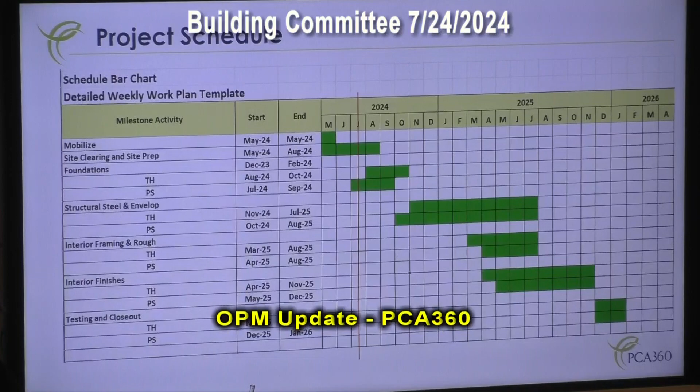Okay, yep. So we'll start with a schedule update. This is a schedule that we received from W.T. Rich, a very high-level Gantt chart of the project. The red line shows you where we are in the process right now. So the site clearing and site preparation work, we're more than halfway through. Foundations for the public safety building are underway. They've been making great progress, and I'll show you some photos of where things stand.

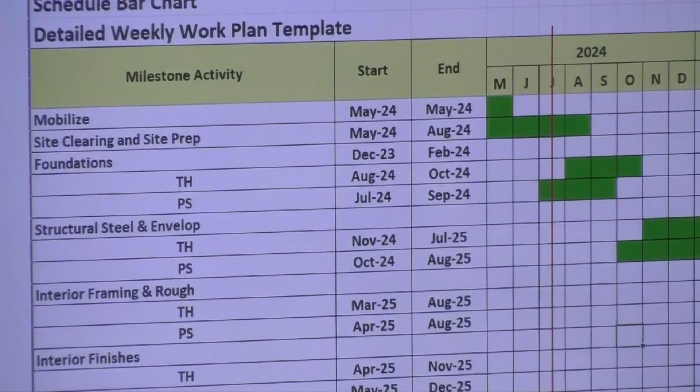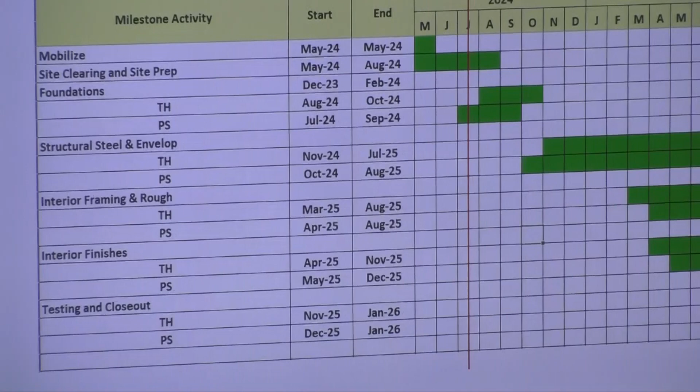Very soon, W.T. Rich will be working on the town hall foundations. So that's good news. And it shows the structural steel for the public safety building will begin first, and then the town hall will follow after that in the month of October, November. At the moment, it looks like we might even be doing a little bit better than scheduled.

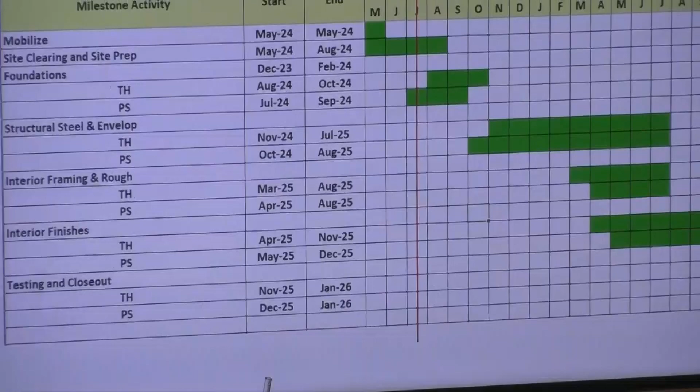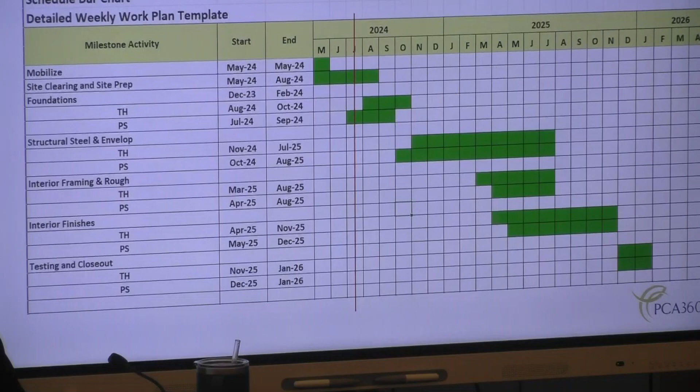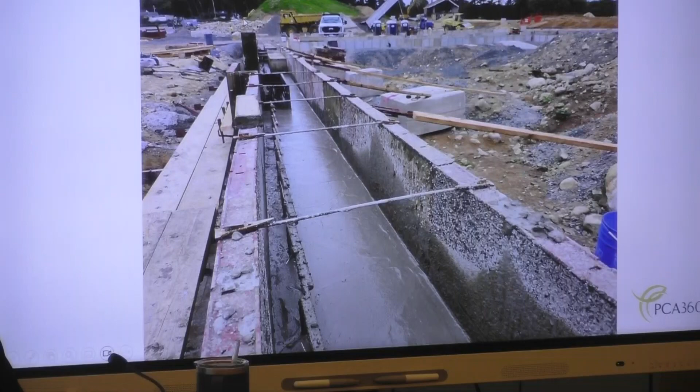So that's that. There's an image. You can see the old clubhouse off in the background, the giant mound of dirt that you can see from Route 114. I was joking with Mr. Hood at the end of the table, we were going to call it Mount Hood. I see what you did there. Go up and measure it, 65 feet.

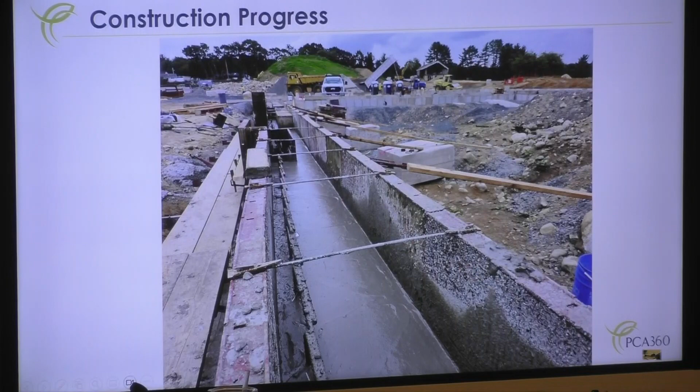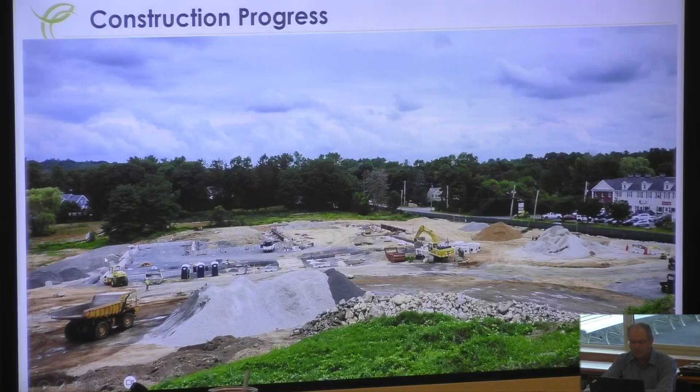This is the front corner of the public safety building. This U shape here will be the back behind the apparatus bays, and there's where the parking secure park end of the public safety building will be, this end here. And you can see over on this end, they're beginning to build up and prepare for the future parking lot. The secure parking and the communication tower will be in this area here. So you really are starting to see the outline of that.

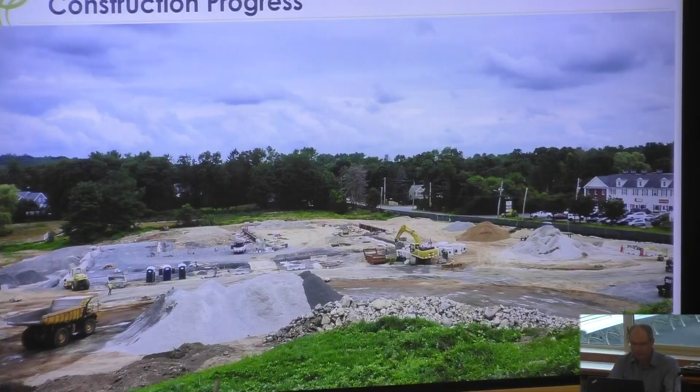Great. And then the road coming in, they just started preparing the bedding. You can actually see the shape of the road bed is beginning to take place too. So that's that. And then we have a time-lapse video, which is on the project website. So let me play this for you.

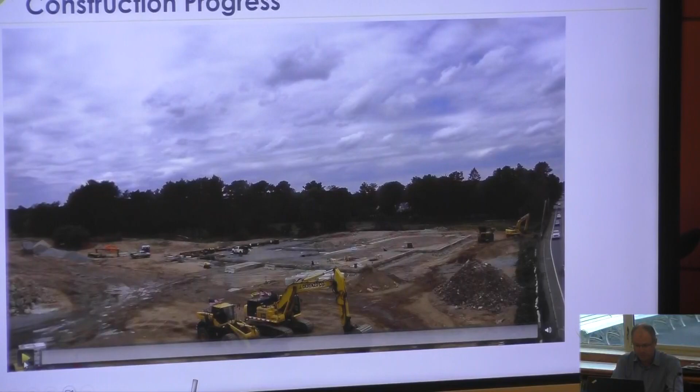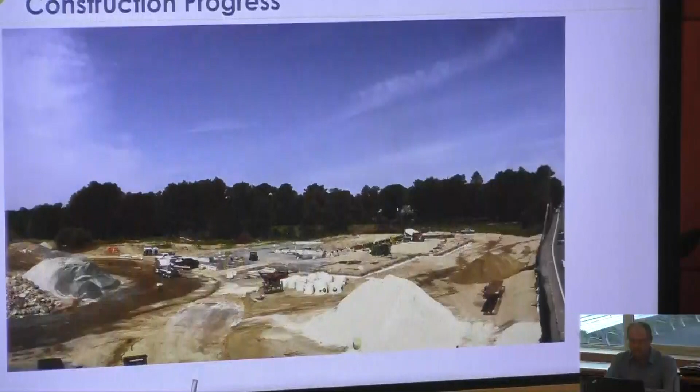This is just about a 2-week time period. We just got the cameras set up after the foundations had already begun and the site was cleared. So you're really only seeing about a 2-week period. We'll be updating this about once a week, as the time-lapse video gets longer and longer.

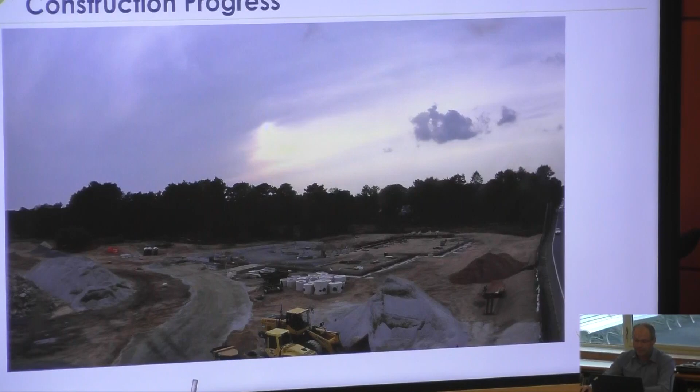So it's on the Middleton-MMC website. And again, from this view, you can see the roadway coming in pretty pronounced. Cool, looks like a project. So on Tuesday, they began the demolition of the clubhouse. You can see they're just reaching into it now with the excavator. It was down at the end of the day yesterday, and they were starting loading out today.

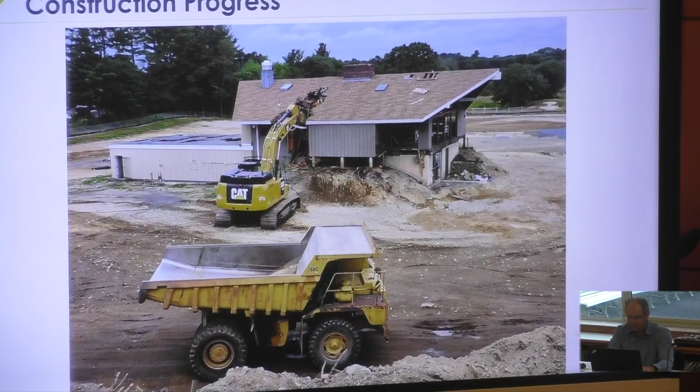A little quick update on the budget. I printed out for you, Jackie pointed out, a larger version of the budget that I normally present to you, and nothing significant to report this period. What you have in front of you printed is the detail. What I have up on the screen is the summary. We received our first construction requisition for the project.

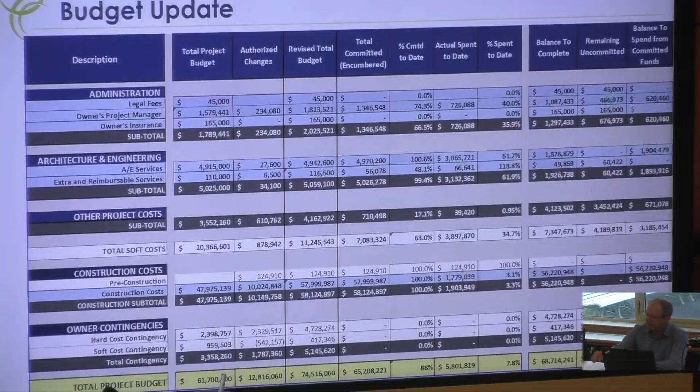There was just over 1.7 million that was submitted yesterday and will be on the next warrant. So that's reflected here in the costs. Actual spent to date, even though that hasn't hit the warrant yet, I track it as soon as I submit it. We're at $5,801,000 so far, 7.8% of the total project budget that has been spent so far.

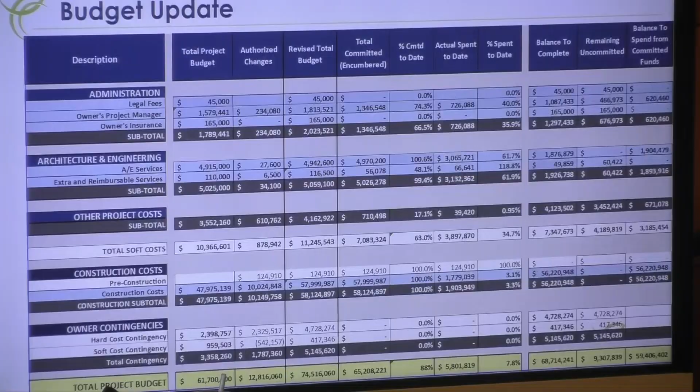So nothing, no moves just yet this month. Next month I will have a few. I would point out at the very top under administration, the third light blue bar down, owner's insurance.

That was builder's risk insurance. We did work with the town's provider for securing a builder's risk. We also, WT Rich, worked with their vendor. And in the end, the best, most competitive price we had was through WT Rich.

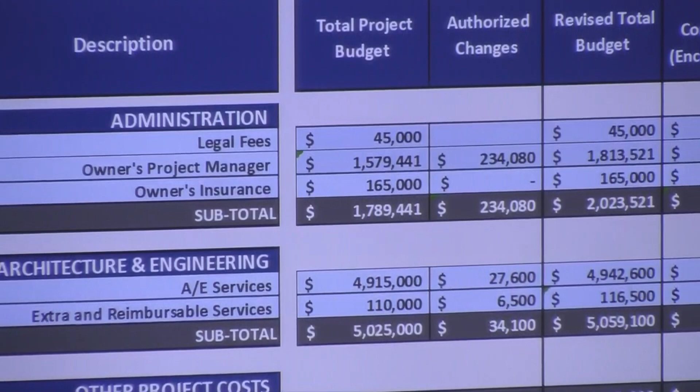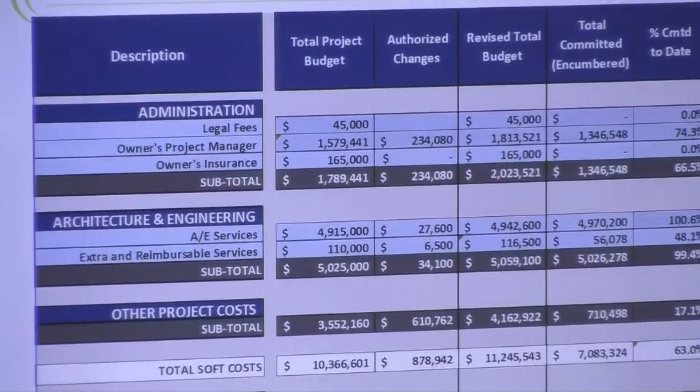That's the good news. The bad news is the insurance companies were classifying the buildings as wood frame buildings, even though they're substantially constructed in steel and concrete deck and CMU block, but the roof is wood truss. And because of that wood truss, they classify the whole building as a wood frame. So the builder's risk policy was more than we were expecting. I'll present to you a little later in our presentation the actual number, but it was a little over $300,000.

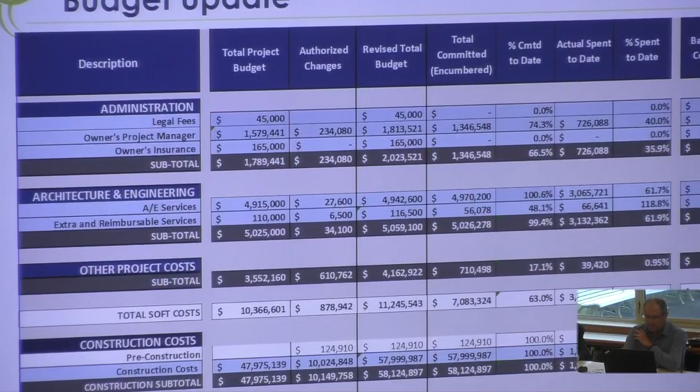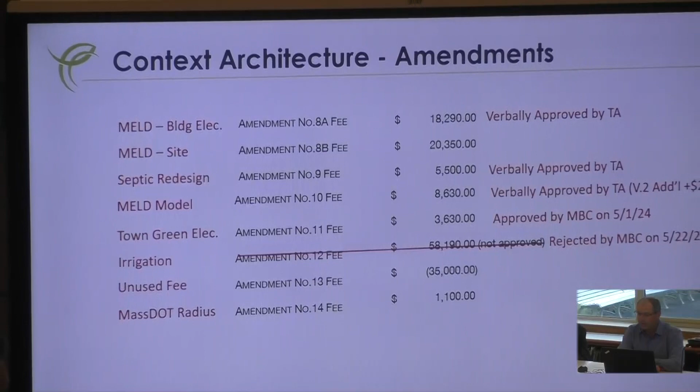But I'll explain to you how we're going to cover that cost. So that's the update here on project budget. Nothing significant really to report. We do have some amendments to contract that we would like to get approval on tonight for Context Architecture.

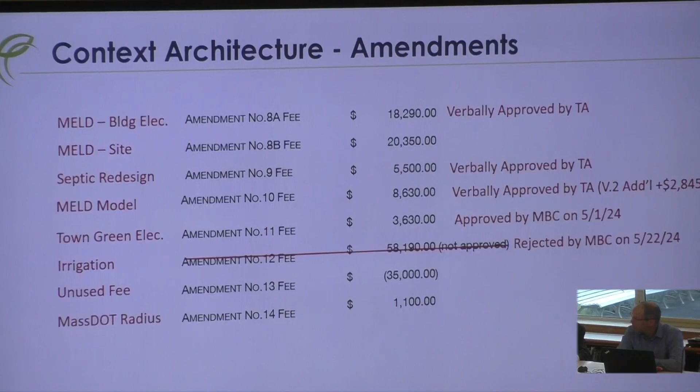I've summarized some of the ones that were presented to this building committee on the 1st of May. I just wanted to sort of recap some of these. Jackie, you and I talked just before this meeting, we're going to bring these to the select board at their next hearing at the end of the month and get these all executed for Context.

So the first one, 8A and 8B. I actually asked Context to break this into two. When we presented this to you before, it was one. We asked for it to be broken into two. There's really two very distinct scopes of work related to the MELD peak load shaving generator.

The interior of the building, the electrical systems of the buildings are changing because we're changing the life safety generator. And that has an impact on the main switch gear, on the transfer switches, and the actual generator selection. We met with Justin to go over this, and we got a contingent approval to move forward on just that portion of it so that we could keep things going.

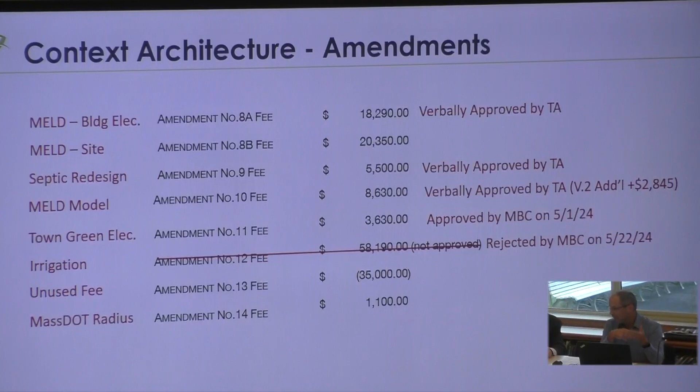Because one of the things that we learned now that we have Wayne Griffin Electric on board, the lead times in some of these equipment is still quite long. And so we're under pressure not to impact the project schedule. We've got to get these reselected and resubmitted so that they can be ordered. So that had to be done very quickly so that we weren't impacting the project. So we received a verbal approval to proceed.

And then we presented this to you in our last meeting too, so you're aware. So no vote was taken. But the other half of it is the site cost. And at the time when we had that proposal, we were still not fully clear on what the site impacts were. We were still working that out with MELD.

We've received a lot of information. The feedback has been great. The dialogue has been excellent. Now we have a very good understanding. Our team knows exactly what we need to have for infrastructure to support the generator. So the cost did go up a little bit more because there is more work than we originally expected. This cost here covers the site electrical and the civil work associated with the MELD generator.

So we would like to get approval for both 8A and B, I guess. Well, 8A we already have contingent, but B we don't. So if we could get an approval on that.

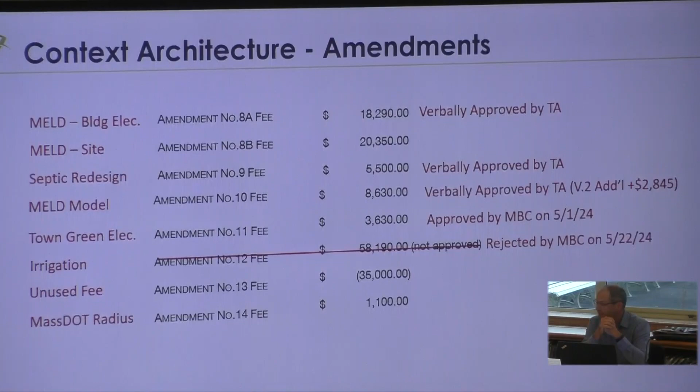I don't know if you have questions, if you want to see the actual proposal—I think we have it as an item further down, don't we? Yeah, I didn't know if you wanted to handle this under business and budget stuff, or did you want to take this later? Folks, what do you want to do? I'm happy to just dispose of it now if we want. All right, sounds good, I'm happy to take a motion. Kind of why I asked if we could have a little latitude on the sequence. No problem, I didn't realize that was the sequence you were referring to. Well, there's a few others coming at you, so. All right, nice.

Last question—I think we've had Context doing work to redesign things.

Is that something we haven't actually authorized or come up with a number for, or did we? I'm trying to remember - those redesign costs, as you were figuring this out from the modeling cost. So that's what I call the MELD model, I believe, is what you're referring to.

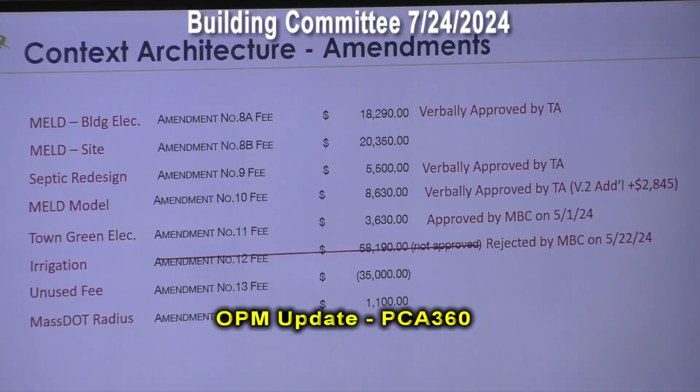That's number 10 again, which we presented to you on the 22nd - 3D versions of this generator in situation, different options. It was number 10, which was the 8,630. We had a verbal approval to proceed. We had a building committee meeting coming up, and had to get you information so you could react on it. Understood, so we did get that approved.

We'll be asking on number 10 for an addition, because when I presented it to you last, we were at option 3. We just circulated around option 7A. So there's been a lot more adjusting to the location. I'm going to present that to you in a moment. There's some additional work required of Context to support the positioning, which we'll report on in a little bit. We have some good news.

I know all this is still being covered by MELD anyway, right? So this is just for our contract, and we'll be reimbursed for that - is that how it's working? Yep, that's our end of it. So there's two elements: some costs associated with installing this are going to eat into the overall savings figure MELD had originally proposed. Secondarily, I've had conversations, but no official confirmation yet, that they're agreeable as part of the MOU we're setting up to pick up a portion of this cost directly, as a gesture of goodwill.

I will say we are expecting - clarify that for me, because my understanding was that they were covering all the costs for any redesign required to put this thing on the lot. That's what my understanding was. Is that what you understood? I could have misunderstood it, but I have to go back and look.

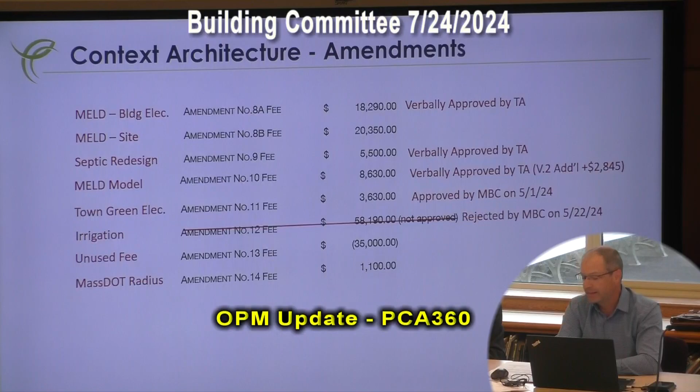So the septic field then will be adequate for both buildings? Nope, there's two separate systems. So they have two separate fields.

How is the septic working though? You've got two separate fields and holding tanks. There's holding tanks, and then it goes to what's called a pressure dosing system. There's a pump chamber that's put in, and then that goes into these chambers that are like half moons, and it sprays up into the half moons to dose it evenly across the field.

We won't have our own treatment plant there. No, both buildings are going to be separate, typical septic systems. We don't meet the groundwater discharge permit requirement.

And those tanks will have to be pumped on a regular basis? Oh yeah, yep, just like any other septic system. It's really a distinct difference between the one at my house and what this will be.

Big time. So the difference here is that because it added that extra flow, you're required by Title V to actually dose it with a pump. So they had to design a pump and expand the fields a little bit. That's what this $5,500 is for.

Okay, which I've reviewed and looked at it too. I'm good with it.

Okay, you want to take a vote, just so that we're covered, for the select board. I think they would like to hear from you that you've reviewed it and you're making your recommendation.

Sure. This is something we had talked about, not the details, but we discussed this maybe in May. I don't think it was last month. That's right, it's all submitted a while ago, and it's been accepted.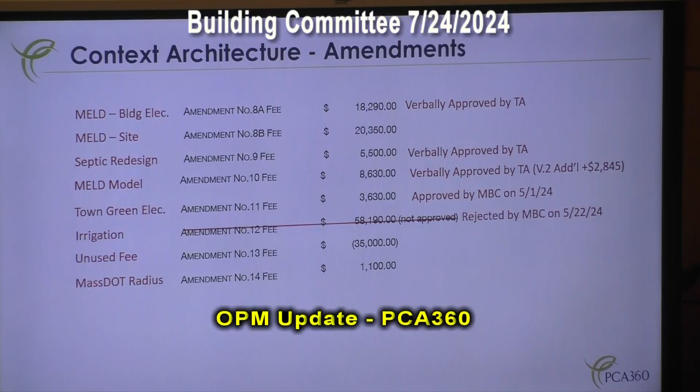So I just wanted to see the figure, the 58,000. Yeah, for the design. It was a high number, but now I want you to see what it is when you put the cost of the whole design build together.

So we have this proposal that we received. Tom has worked very hard on this, Tom Hood, with their landscape contractor, LEI. They provided a preliminary plan that has 49 zones, I believe. Thousands and thousands of heads.

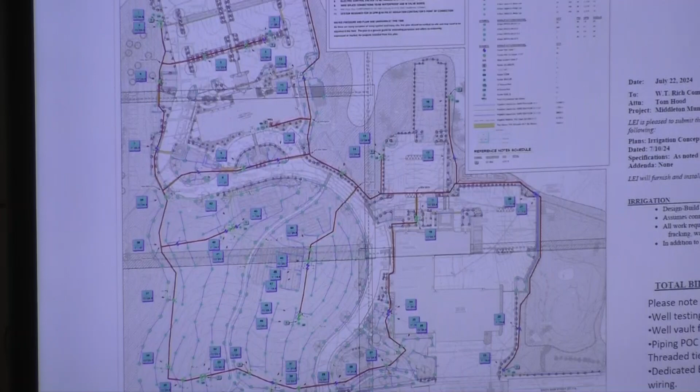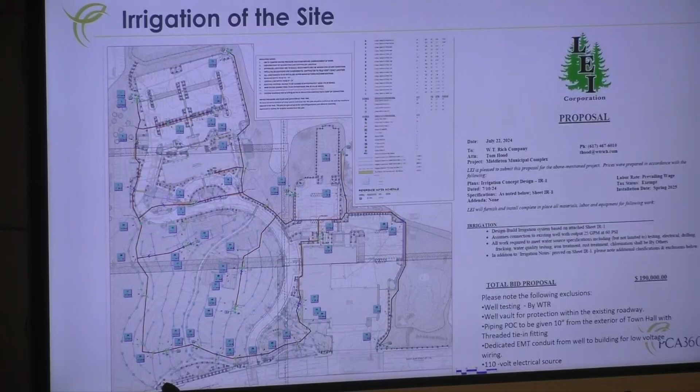So in order for them to truly design a system, there's still some variables they need to know - the flow rate of the well, the recovery rate, basically the capacity of the well and so forth. So Tom is working with Middleton Well Company, Middleton Drilling and Well Company. They are actually on site today, working on getting the data they need to finalize a design.

And then there's some other additional costs in addition to this proposed price from the landscaper of $190,000. We'd still have to get a chamber to go over the wellhead, and have some sort of weatherproof cabinet where we could bring all the controls. So there's some other associated work, electrical work and so forth. But I think the 190 covers nearly the whole site. That's what I was saying, yeah. It's substantial. Yep.

Jackie, I know you wanted to make some clarifications - whatever system we do would be well-based and subject to the same parameters as the town. If there's a watering ban, the system wouldn't be able to operate. We don't have that for wells, though. We want to set a good example, that's the point, Bill.

That's something I would... if we don't want it, I think the question is do we want it or not. We have a town green, not a town brown, so it's entirely up to you folks how you want to do it. Do we want to table it and discuss it again? I'm indifferent on it here. I wouldn't abandon a well if we're gonna use it for irrigation, that was the point. So if we're not gonna use irrigation and we choose as a town not to do it, I understand the pros and cons.

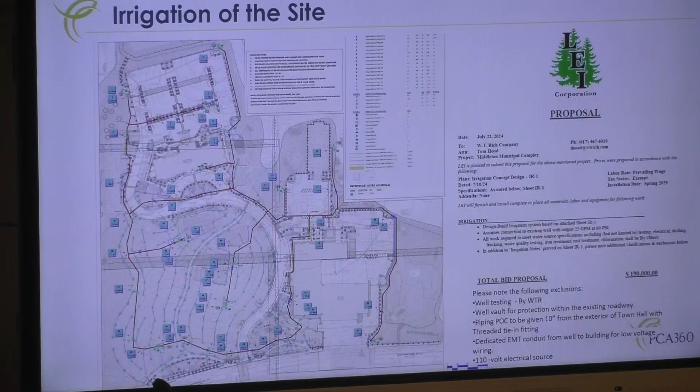What do those blue squares represent? Those are each zone. Yeah, let me switch to the PDF.

At one point I recall a discussion of maybe not doing the entire site, but just the bowl out front where the gazebo would be, and the plantings in front of the building. I think that makes sense, and then maybe finding some drought-resistant natives for everything else. Scaling that back makes sense.

Just looking at the numbers - the cost to design it was $60,000. The cost to essentially build the whole thing, with probably a little bit more, is 4 times that cost. It was still a huge savings doing a design build, so we're definitely seeing substantial savings.

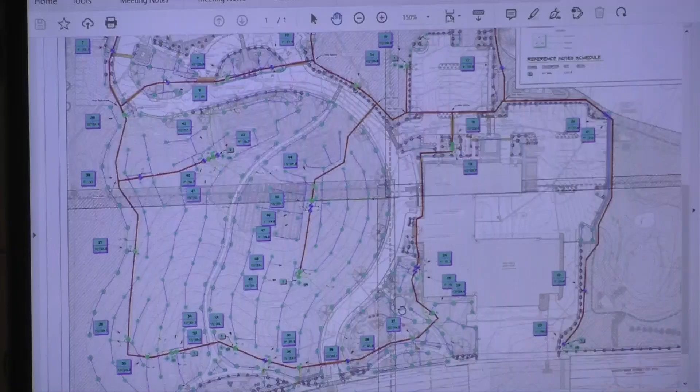I always thought it was just going to be for the green alone, that's what I was envisioning. Yeah, when we provided a diagrammatic scope of work for them to price, we had just picked up this front area, the town green, and the area with a lot of plantings around it. They took that and went further - might have gone a little overboard, you think? They were concerned with the asphalt.

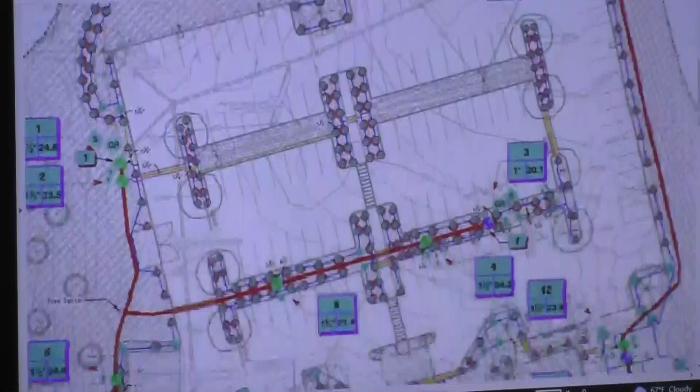We have asphalt berms in the parking lot, there's a lot of heat generated. So what they did is design what they felt was the right system for the project, and from there we can value engineer it out.

This is the area where they added the back parking lot - I think this would be the Cadillac version, as much as you would ever want to do. Certainly you can dial it back from here. I think you could knock off probably half of it, but I think your point is the conceptual piece.

Conceptually, it's a much better deal. It's probably gonna be around $100,000, right? You're gonna nix probably the back half of it and the stuff by the pavement - I get the concept that it's by pavement, but I do a lot of plantings adjacent to pavement all the time, as long as you pick the right stuff.

Certainly all this stuff around the parking lot, and the stuff behind the town hall, those are all gonna be drought-resistant. Chris, you wanted to keep this? Well, we don't even know we're gonna do this - here, between the building and town hall.

Mr. Chair, I think it'd be great to get our DPW director to take a look at it as well, because he oversees all of our town fields and watering, and it'll be his long-term operating responsibility. Sure, for sure.

I just think, keep in mind policy-wise, the town voted on it to not regulate wells individually for the town - that was in 2019, the same meeting when we got this project approved, they voted on wells. But I thought we just heard it was going to be regulated. No, I misunderstood.

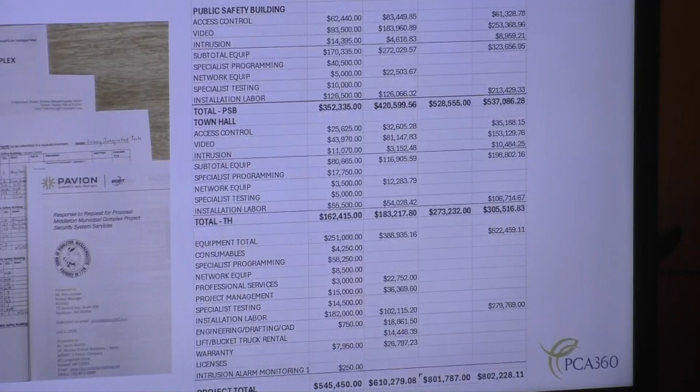We did receive 3 responses to our request for proposals for security, closed circuit TV, and intrusion alarm systems.

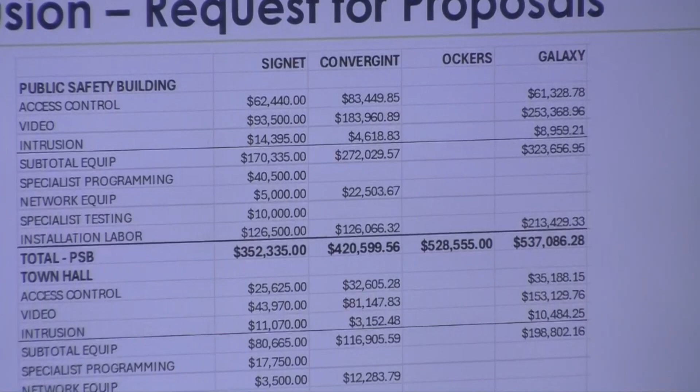Right now, this is our bid leveling. Signet is the lowest. There was a meeting today with the IT team to review the proposal. They have questions, so they're going to work on reviewing Signet and Convergint and get some answers. So we're still in the vetting process.

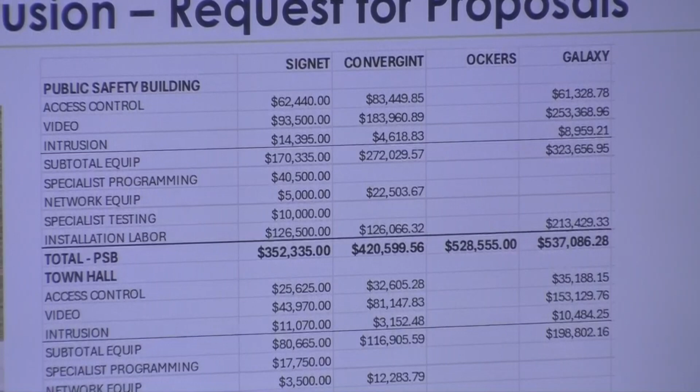This is where we're at right now. I do have in the budget, we made some moves. I have 580,000 allocated right now for this, and Signet is below that. Convergint's just a little bit over.

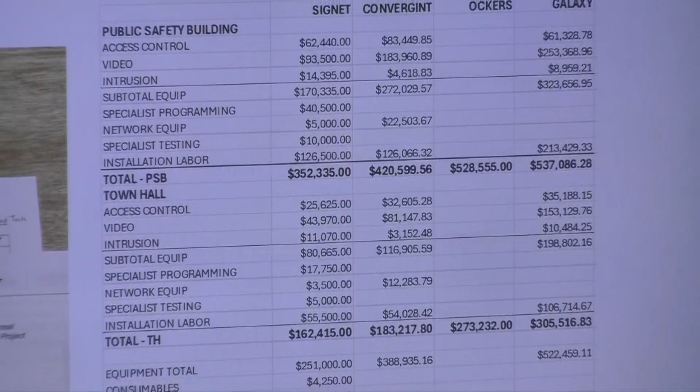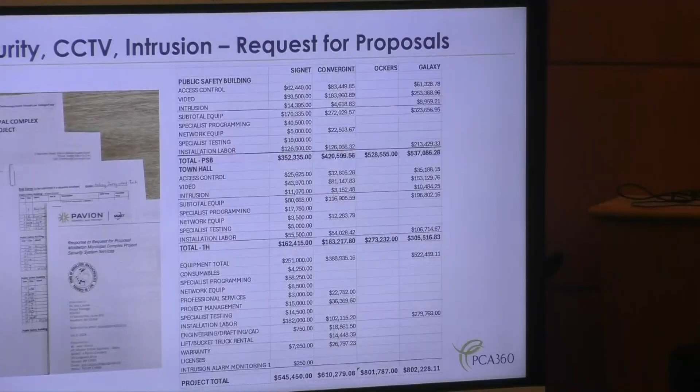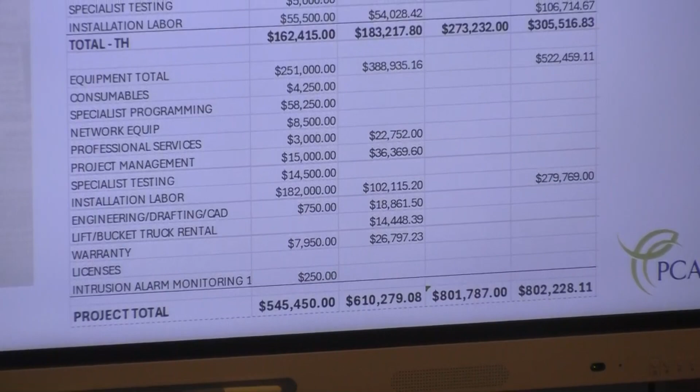Are they the preferred vendor for the town? Are they the ones doing our work now? We don't really have a preferred vendor. Vigilon is the system that is used now. Convergint was proposing Vigilon. Signet was proposing Genetec. So it's kind of using the same system, is that the idea? It's a manufacturer that creates what we would be using within the scope of the provider.

The main question we asked Brian and Alex to get from the two vendors today was the ongoing maintenance costs, because we need to factor that into our operating budget no matter what we pick. No action needed for the committee, just an update to let you know where we're at. So it was a great opening, we're happy with the results.

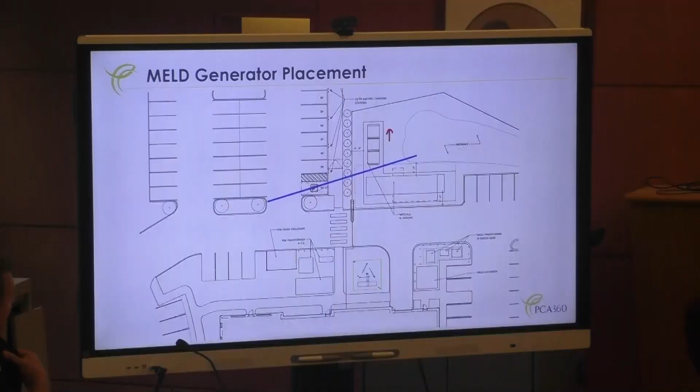All right, generator placement. I have the latest and greatest sketch, but I marked two items on this to show the comments you had, Bill, I just wanted to make sure that becomes part of it. I have relayed these comments to the team. There's a catch basin here that collects all the water of this parking lot, and there's a pipe that goes straight to this detention basin. Bill raised the concern about making sure that this pipe in the future, if it needed to be maintained, could be.

So we're going to disassociate this slab for the generator from the slab of the cooling units, and we're going to push the cooling units further away to create a gap here between the two, so we can dig through it in the future if it needed to be replaced. So we're not placing any equipment over piping.

Just keep in mind, if they're constructing that between these two slabs, you don't want the slab to be undermined if they're trying to construct it. So wherever they are, I'd like to see something maybe going vertical, or there's ways to either bury sheet piling or do a concrete little mini wall, or even a small sleeve pipe, so you don't have to really get in there. You could even do that, I'd be fine with that.

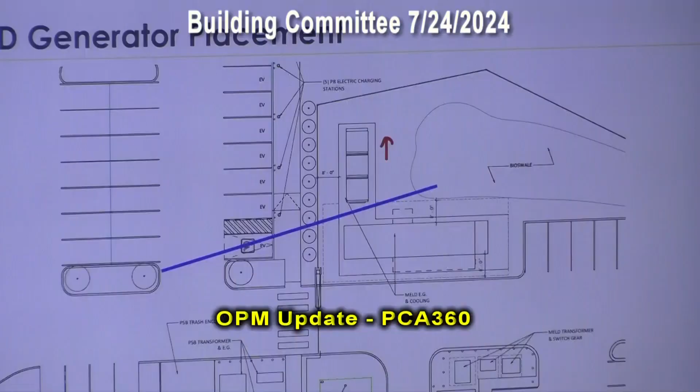Might be better than moving it, because think about it, if I'm trying to excavate through that, in all likelihood I'm undermining both of those slabs anyway. Maybe just put a larger sleeve and run the pipe through. That'd be my preference, I think that's the better way to maintain it. All right, thanks, duly noted.

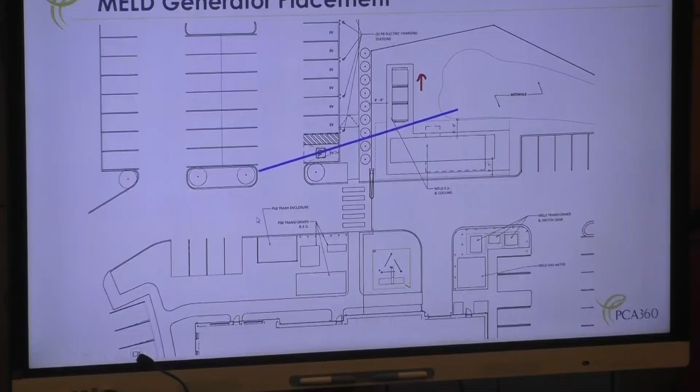So the plan has changed a bit. We lost 4 spots in the secure parking area, but we were able to pick those up here, so there's no net change in the parking counts. We were able to take the dumpster that was originally lined up on this drive aisle and move it over here. This whole parking lot has shifted 20 feet towards the left of the screen, and that allowed this space here so we could get the cooling unit in, with 8-foot clearance for servicing and also for free airflow.

We have arborvitae, a row of them for screening, and then we're going to put 4 trees along here too, so that as you're driving along the road coming into the site, they'll give you some screening as well towards that direction. So the committee, when we met last, we had shown you the generator going in the vertical position on this drawing. It's now going across.

The reason that's an advantage over the previous option is that it's narrow to the town green. I think that was our preference at the meeting, right? I think you had asked for that at the last one, but we didn't show it to you since we didn't have it modeled. Right, but we had asked for it. Yeah, and so to the neighbor off this side, they only see the narrow end of it, and from the town green, you also see the narrow end.

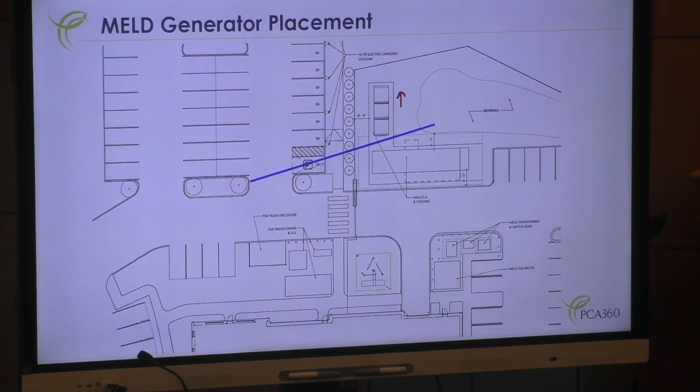And behind all this bioswale is a tree stand, so it has a backdrop too. I think we've arrived at a pretty good location all around. Grading works - is that the top of the swale? That's the top, good. The delineation is the top. And there's still 8 feet from the unit to the top of the swale.

And you can make the swing in, keeping the drive aisle coming in the same. Yes, I know you moved everything over, but they still can make that turn. We looked at that, we haven't changed that at all. This radius got a little bit bigger to facilitate the turn-in.

We're taking some of the equipment associated with the generator and putting it across the drive aisle, so that we're not impacting the bioswale area. So there'll be a transformer and a switch. And then one of the other pieces of equipment shown in this diagram is actually going to be next to the town hall. And then the gas meter - Meld is working with National Grid. At the moment we believe we can place the gas meter here at this pad and bring the line in across.

One question on police and fire - have you folks reviewed this? I have not shared it with police or fire yet. I wanted to get your blessing and see what your input was, if you're okay with it, and then we'll continue to solicit some comments from them.

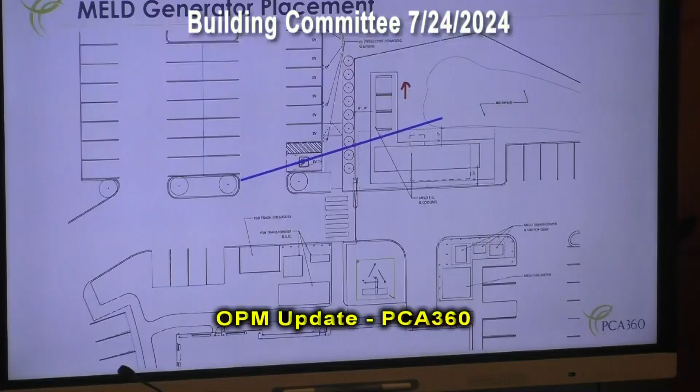What's in the green box next to it? It's the communication tower. Okay, that's okay. Yeah, the green - I don't know, it's just the fence, it's on a layer in AutoCAD, it turned green. And then we've got 3 other boxes that I can't quite read the description.

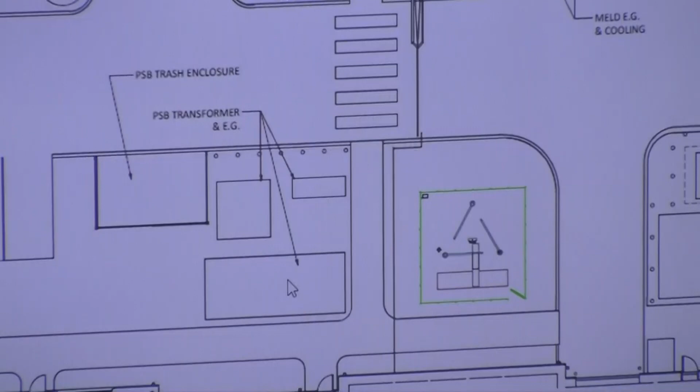This is the building transformer for public safety. This is the switch that's associated with it. And this other rectangle below is the generator, which is a 60 kW generator for the public safety building, substantially smaller than what it was.

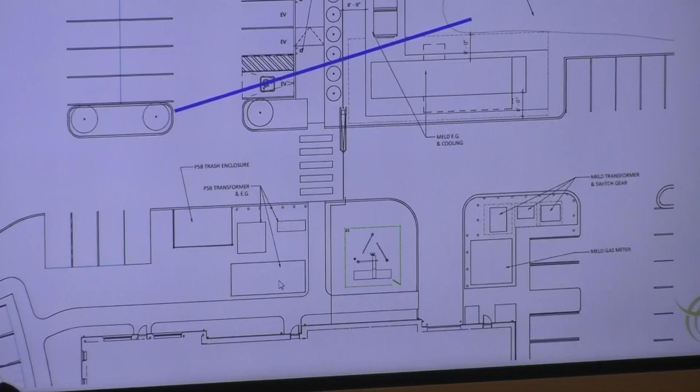And so the concerns that the police chief had in terms of having an unsafe area as people are exiting the building - that should be small enough to not block anyone's view. Another option we might consider to that point is maybe put it vertically and then put the switch there, just so that it's not creating such a wall to that door.

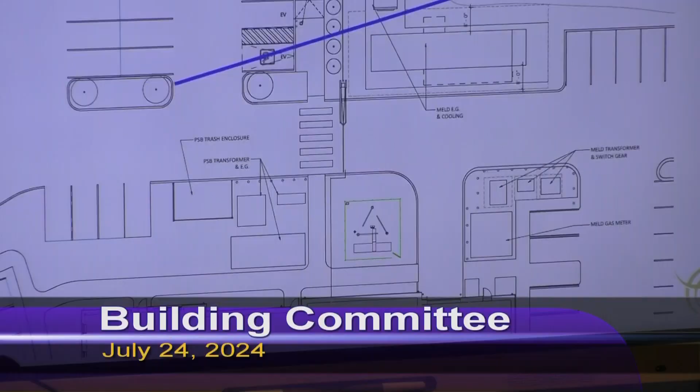So we could do that too. It's whatever the chief would want, honestly, on how he wants to configure stuff. I think that when we present it to him, we might show that, just because that was a concern. I'd just like to make sure we get at least a sign off from both chiefs, just to make sure you guys are all good with it. Sounds good, we will do that.

And then I think you have some good news to report from U.S. Fish and Wildlife. Yes, this particular strategy with the L shape has been signed off by U.S. Fish and Wildlife in writing. I saw the letter today, so everybody has a copy of that. Very clear that they understand the whole project, so I'm good on my end, that checks the box from last meeting.

So I guess we need, contingent approval, we still got to get input from police and fire, but are you happy with where we are with the plan? Yes, I mean, I think this is the best you can do, so this in my mind would be a good design. Yeah, I think of all the places on site, this is the best option. There you go, and Meld, if you're listening, thanks for working with us on this.

Just a question, and I'm not recommending, not asking for any changes, I'm just curious - you said you lost 4 parking spots in the secure parking, but you picked them up down below. What did that leave you up in the secure? I don't have the total number.

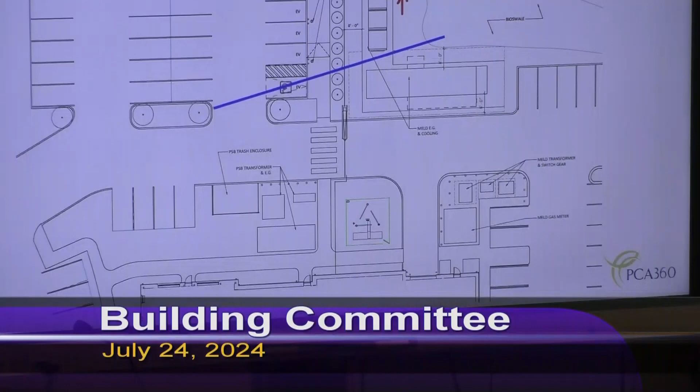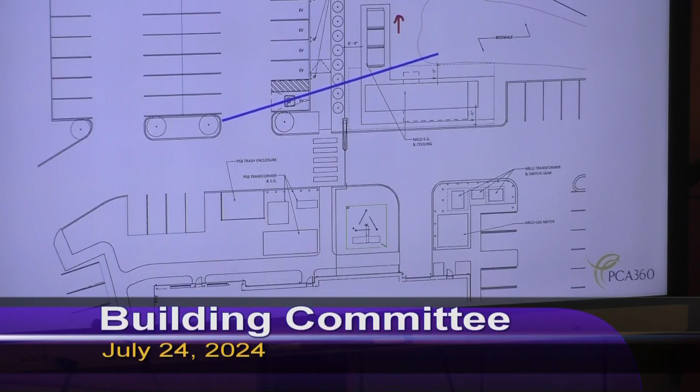The spaces that were lost were EV charging spaces, so I don't know how useful they were really for secure parking since they were dedicated to EV anyway. We were asking to move them out anyway - that was a discussion we had last time that Kyle picked up. So those 4 EV spaces were moved up to here, which also works with our grant, since in order to qualify for the grant, all of the spaces had to be on the public side of the fence. So it worked double duty for us - we lost them, but we had to move them anyway.

Do you want to take a vote? How do you want to handle this? I'm happy to take a vote. How do you want to, what do you think, Kyle? What do you think, Paul?

Option 7A is the plan that we're looking at right now. I move that the building committee authorize Context to proceed with option 7A for the placement and design of the generator, pending sign off by the police and fire chief.

Perfect, I like it. Second. All right, all in favor? Aye. Passes unanimously. Okay, thank you.

Who thought that we'd hit the home stretch on that one? That was a good one. It was a long one ongoing.

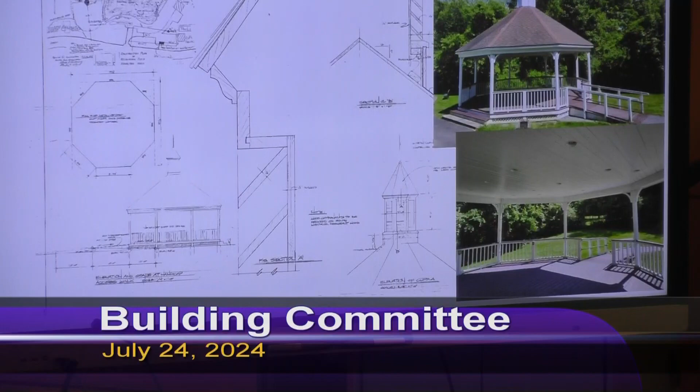All right, next item I have for you is we have 2 alternates in our GMP budget that are in our contract, but we've said hold on them until we've had time to consider them. One of those is the gazebo, so we'd like to talk to you tonight about the gazebo and start that conversation. So I put together a presentation of the existing gazebo, just to give you some thought before I show you the new one.

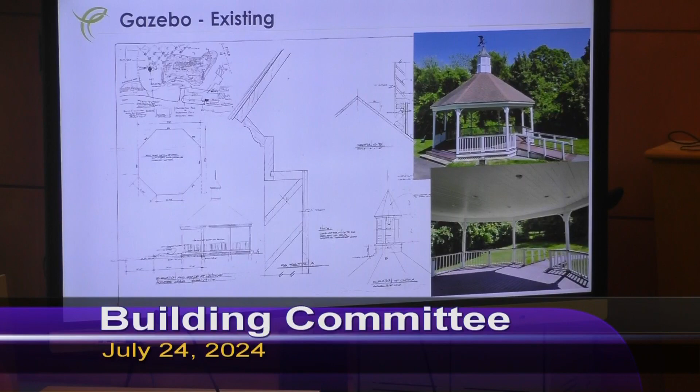So I received drawings from the building department of the gazebo, went and took photographs of it, and found the plans. I took a look at the quality and where it was, and I think all things considered, it's in relatively good shape.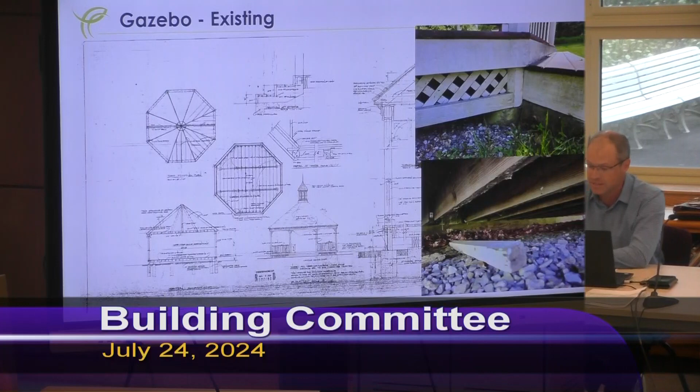Underneath the structure, it's pressure treated lumber. You can still see the tags from when it was bought, so it's not all that old - doesn't seem like it's been around too long. There's some age, it needs just a coat of paint, but that's nothing more - that's cosmetic, nothing substantial. It's set on 10-inch sonotubes. There's a sleeper put on the ground at the midpoint to help take some of the bounce out of the floor.

Overall, other than - this is probably the worst corner that you can see - just a little bit of paint and caulking, and I think you still get some serviceable life on it. You can see some checking on some of the vertical posts, but definitely nothing significant. So all in all, I think it's in good shape.

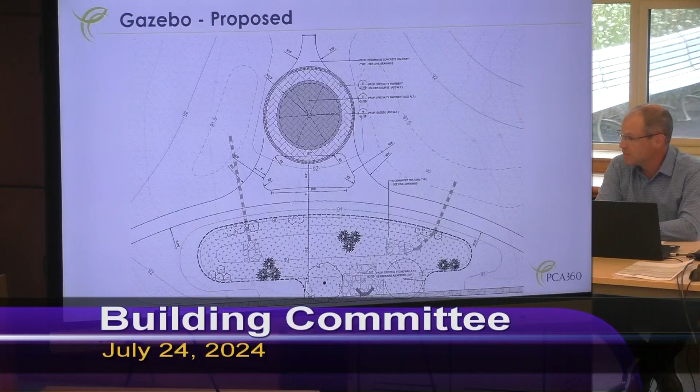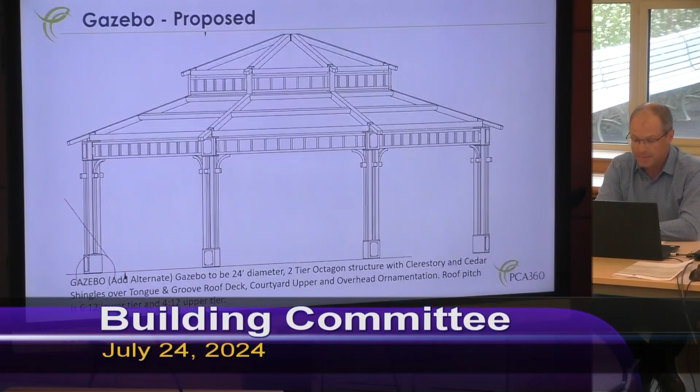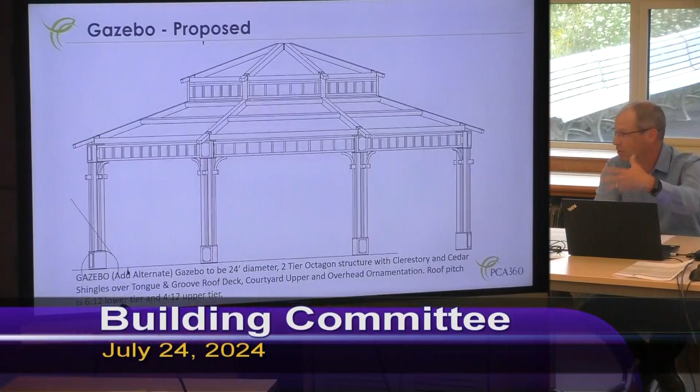What was proposed is larger than what is there. It's a 24-foot octagon, not exactly a circle. So it's a 2-tier octagon, much more ornate, designed to be flat at grade, so the floor is paving, not what you have now. So this is much more accessible, open, no railings around it, larger.

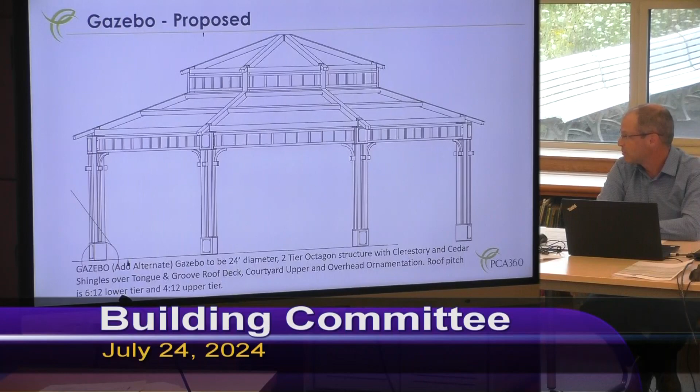Jackie had mentioned to me that field behind the current town hall really doesn't have much shade. You could leave what's there as the bandstand shade structure for that field and put in a new one. That was sort of your suggestion when you and I were talking about it as a potential.

The other item I want to remind the building committee about is we do have a significant amount of CPA funding for the town common, and that can only be used for open space and recreation purposes. I think the mindfulness of the CPC at the time was that the gazebo would be part of it. I also will say, the current gazebo is not accessible - it works for right now, but it's across the field. You can get in the back way, but a performer couldn't access it.

The other thing that Justin and I talked about today is we have the money from CPA for the town common, but we would need to go back and get an appropriation if we rip this gazebo out, to either fix up the hole - that's what I was going to say. So I think that's where the other pieces come into play, and there are certain things like the structure, the pavement, and the electricity that we're going to have to do either way.

So the question is the apples and oranges of the cost of moving the current gazebo versus the cost of just the new structure that's larger and more accessible. That's just the two pieces I wanted to bring to your attention.

Thanks to Brian for doing a lot of the homework on this. I think the issue was that I heard from historical commission members, that's where it came from. So that's the reason we were identifying this as a potential salvage situation. From my perspective, personally, I'm indifferent. I don't know why that was built. I saw the name, I don't know the gentleman.

I'm sure there's reasons behind it, sitting in his library. Well, there you go. So I think there's some historical significance. If it's a rededication, maybe that's okay. I don't know, maybe it's a conversation with the historic folks.

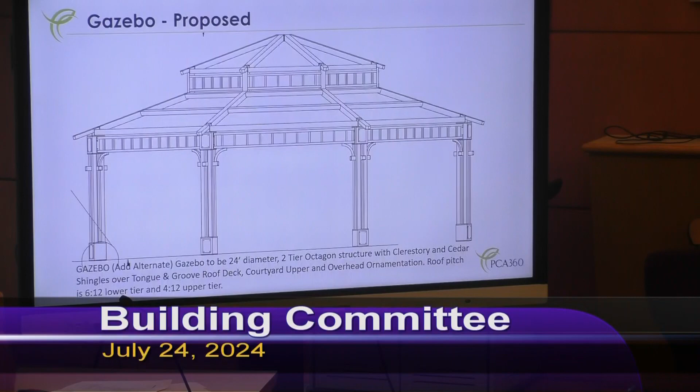I would note that we've heard some rumblings through the community at one meeting, several meetings ago, a price was floated out, but it included the electrical and other site work. It wasn't the true cost of the actual structure we're looking at, and it really raised some eyebrows. So if we could try to ferret out what the actual number is for this structure installed specifically, that'd be helpful. Yep, we can do that.

I would want to add to that pricing, repairing it and making it accessible. The other one has a ramp, but I just think you can't get to it accessible. There's no way to get to the ramp, there's no accessible route. You can get on it, but it's like a back access, you just can't get to it. It's a good design though, I like that one.

Another number to consider in terms of the cost of the old one is, as you pointed out, if there's a hole that has to be filled later if we do go move it, it's not coming out of this project's budget, but the town is gonna end up spending tens of thousands of dollars or whatever else to go fill the hole. So we should consider that as well, because that might actually bring it closer.

Well, let me shake this one out so we can make a decision and maybe not have to continue. From hearing what everybody said, it looks like this is gonna stay for a while. If the town decides not to sell off Memorial Hall and they're gonna retain that property anyway, at least the soccer field, then it's a moot point. If they decide to sell that off in the future, and that's the only way they can sell the property, which might happen, this could always be moved into the back half of the site too. It doesn't have to be in the promenade of our town common, it could be another destination within the walking trails in the back. So from my perspective, I'm thinking we don't need to make a decision on it. Let's not look at moving it, and move forward with the proposed one.

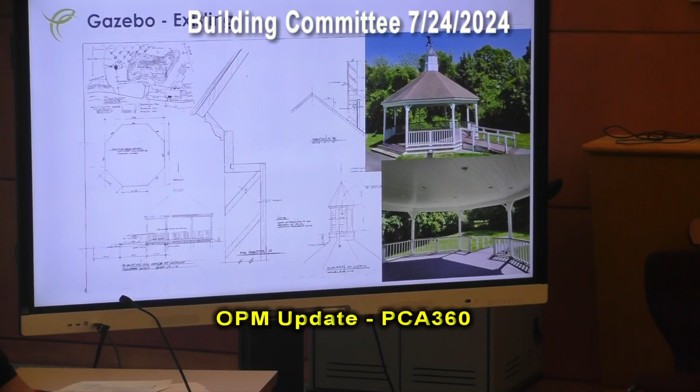And I think too, because the audience will be tiered the way the bowl of the green is, versus the current gazebo where you need the height for a performer when we do the concerts. The proposed design even gives us the option of picnic tables, something there for times when there's no events scheduled, where you could actually go sit or have seating and do other things that you may not want to be moving on and off the raised gazebo.

I very much like the idea of building new. So it sounds like I'm indifferent, you're indifferent, you want to build new. Let's just build this, we'll evaluate it down the road. When the town decides to sell it off, we won't be involved because we'll be off this board, which will be great. So somebody else will make that decision.

That's what I said, it just took me a little time to come around. Do you want to make a motion and vote on that? Let's take a vote. There wasn't an amendment for that, what was it?

That was what I was looking for - the vote to indefinitely postpone moving the existing gazebo? Well that's not something we need to do, we can authorize construction of the new gazebo. Or authorize WT Rich to proceed with the proposed construction, because that's Alternate 3 in the GMP contract. So I moved that the building committee authorize WT Rich to proceed with Alternate 3, the gazebo.

Need a dollar amount? It's already baked into the contract, so you don't even need a dollar amount, just authorize them to proceed with the work for Alternate 3. May I second that? Okay, all in favor?

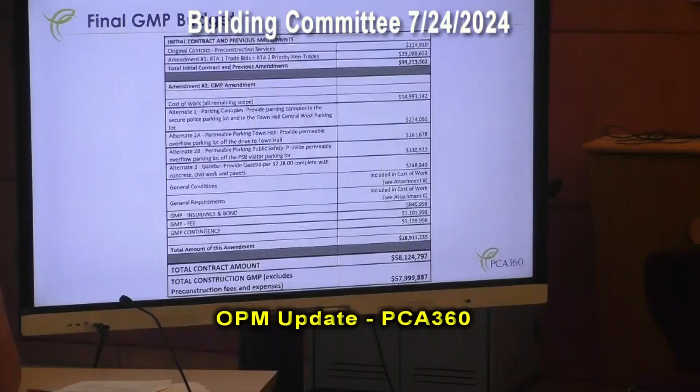Aye, passes unanimously. We'll come to you next meeting about the permeable parking areas, Alternate 2A, 2B. We're not going to do that tonight.

Those don't have anything - irrigation will not change the state of those at all, right? Because they're going to be structured, like an egg crate type material. So it doesn't matter what the organic material is, it won't affect it - no, it has nothing to do with that.

All right, the only other thing I had, but we can do this as part of the construction update, is this handout for some of the PCOs that we've received on the project, so I can wait and do that.

Do you want to circle back to the agenda and just see what we missed? Communication tower update, AV vendor update - did we cover that?

Communication tower update is, we had a single boring completed last week, which allows them to finish their design. We should have finalized tower design foundation drawings at the end of the month. They're expecting to put the foundation in for the tower mid-August, which is right in line with the construction schedule. So we're not holding them up, which is good.

AV vendor is Valley Communications. We should have shop drawings and submittals from them at the end of the month.

MassDOT permit status: we completed the 25% review and provided a response to comments last week. We don't know the timeline of when we'll get anything back, but it's usually about a year, and we're at 8 months right now. This is when they start really ramping up their reviews and get things moving.

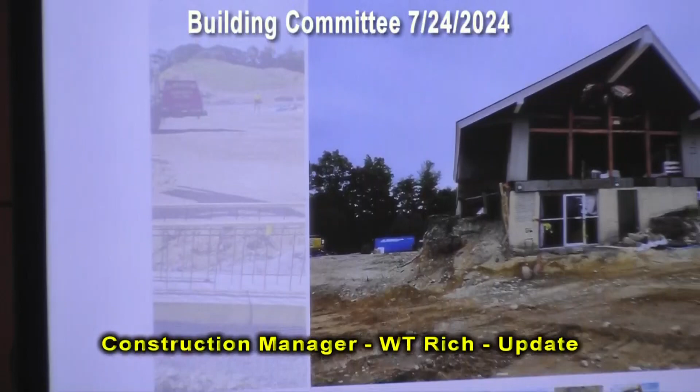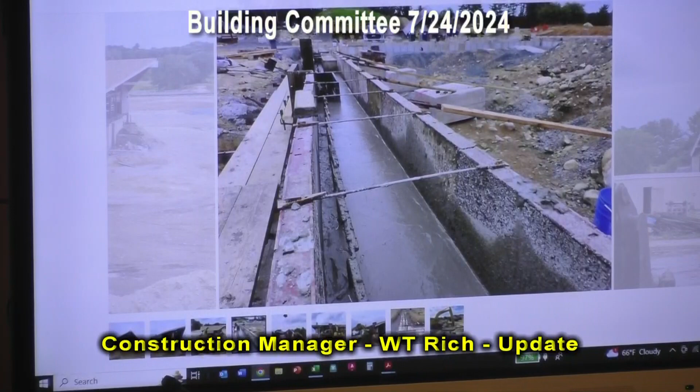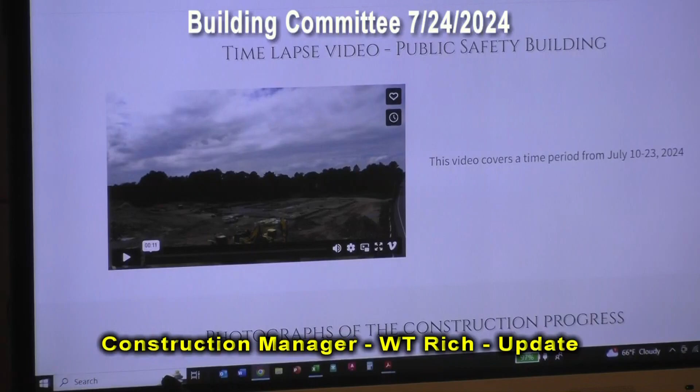Foundations are ongoing. First week in August we'll be over on Town Hall doing footings, completing the rest of the interior footings over at Public Safety. We think steel delivery will be September 3rd, so we are gaining some time on that. All in all, we're on schedule, we're on budget.

Things are moving quick out there. Weather's cooperating, so we're in very good shape with that.

Buyout summary: currently we have Division 10 specialties to finish up. We're very, very close with that, and a little bit of Division 11, some miscellaneous specialties as well. So we're close. I'd say within the next week we'll be presenting a request to award over to the building committee.

Permit status-wise, our surveyors are currently working on the as-built drawing for the public safety building so that we can submit to building and inspectional services for our building permit. It'll be done in two phases: first public safety, which is 99 South Main. We'll get that permit, and then we'll do an as-built when we finish up the foundations for Town Hall and apply for that permit.

On WBE/MBE goals, we are still early in the process. We're seeking input from our subcontractors. Being recently awarded, they're still buying out their project on their end, so they don't know exactly who they're using yet. Supplier vendors count towards our M/WBE goals. So right now they know where they are with the companies, but not with their subs and vendors, so that's what they're working on. We'll know more in the next few months.

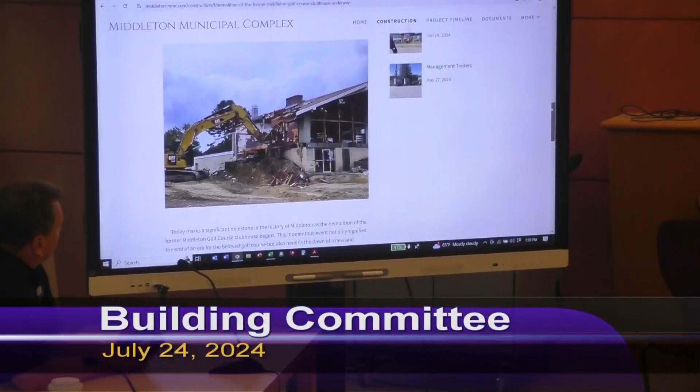Oh, that's good. Yeah, please go to, so we have the Middleton groundbreaking, we had the photos to memorialize the coming down of the clubhouse. Very cool. But we have a write-up, sort of almost like a news article on different things going on in the project. When the first foundations were laid for the public safety building, for the removal of this and so forth.

I totally didn't pick up on the blog when I poked around on that website. I'll have to check them out. It's at the bottom of the construction tab, but if you're a follower of our Facebook and Instagram, you'll get it. Oh, okay. We had an issue, it wasn't pushing notifications, which we fixed. Jackie, I think, was the only one that was reading it.

There you go, that's good. That's interesting, number one Instagram follower. The website has had a number of hits, I'm fine with number 2. I like it, I like it. Yeah, we received over 1,000 hits on the website in the last 30 days. That's good, that's great. So again, the website is.

Middleton-mmc.com, yes it is, look at that. So please check out the construction page, and it's linked from our website. You can also get it at the town webpage if you're interested in seeing the cool things going on, in that time-lapse video, which will get even cooler as we get further into the project. We update the photos weekly, the time-lapse video will be updated there, and the blog every few weeks. I like it. This is on the construction page where people will see the most activity, aside from documents getting posted. Okay, yeah, I like it.